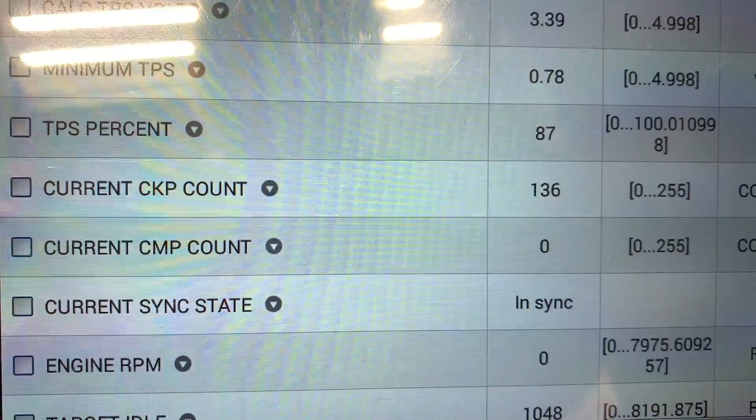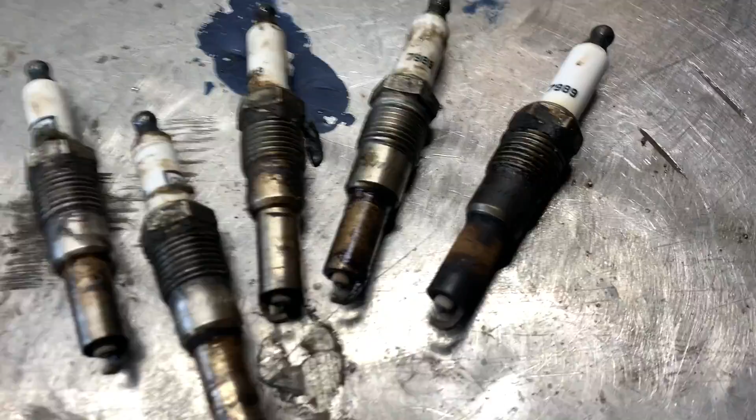Not getting a camshaft signal by the looks of it. These ones were definitely the hardest ones to get out for sure. Probably would have had a couple broken ones.

You know, Mr. Toms, it is not very nice out today, and I totally understand why you just want to sit on the chair and sleep. It's okay, you can do whatever you want, Mr. Toms. Mr. Toms.

Yeah, it's definitely not very nice out today at all. We got lots of videos to edit today, but need to run down to KMS Tools. They got sawhorses on sale, 2 fold-up ones, $54. He's gonna be starting on the 8.8 axle pretty soon, get that out of the way.

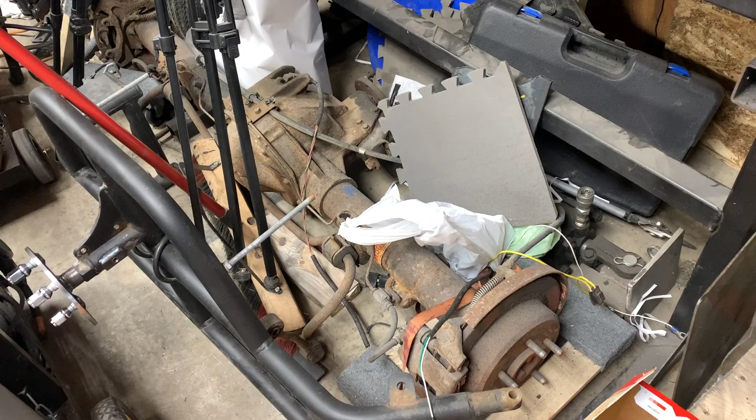They say they're good for 1,000 pounds, plastic though, so when I start working on the axle I'll have to put a fire blanket on it to help protect it. But probably in a couple of weeks, start tearing that old turd down, getting it ready. Lineups to get into Princess Auto, just like Russia waiting for the bread.

What do you got on your nose? Here, what do you got on your nose? You got some sand from sniffing the ground after you took a big dump. It's raining out and you have to come outside just to take a dump. Sometimes I just don't get you, and I don't. You're gonna sniff my hand before you bite it? Is that what you're gonna do?

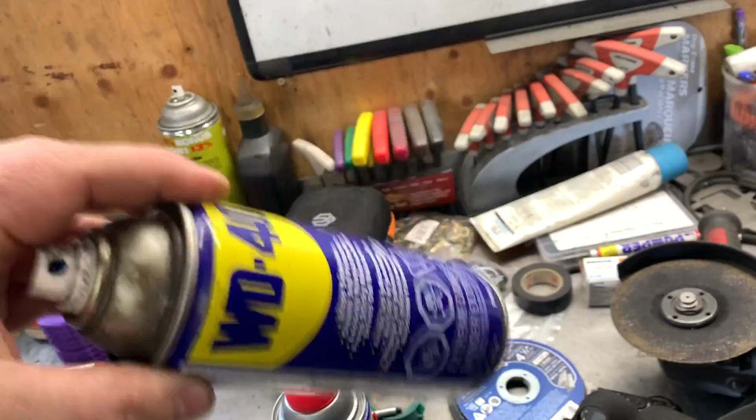And this can of chain lube is fucking done with. Fresh new can of WD-40, but what I really needed to go to Princess Auto for was cutoff wheels. I got 1 in the grinder and 5 right there. Hopefully it'll be enough to get me going.

Princess Auto wanted way too much money. And I don't know about you guys, but unless a cutoff wheel is about a 16th of an inch, I just don't understand how people could use the thicker cutoff wheels that are like an 8th of an inch or whatever. Those are way too big. Way too big. Let's get this Jeep outside and start building the metal tube bender stand.

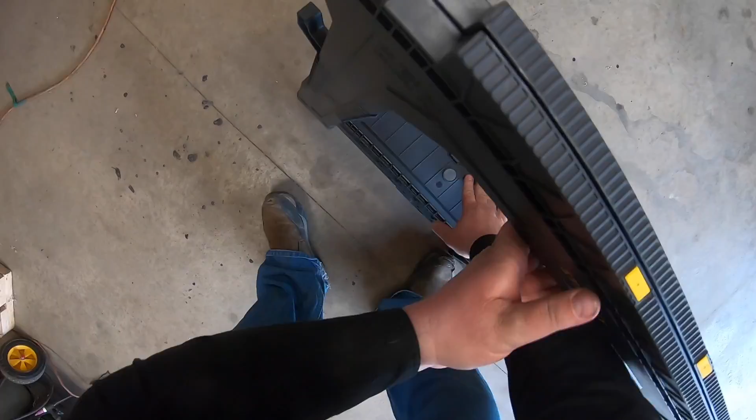Well, let's see how complicated these sawhorses are. That's it. All right, let's grab this metal. This one I'm gonna use to help build it, except for the 1 inch.

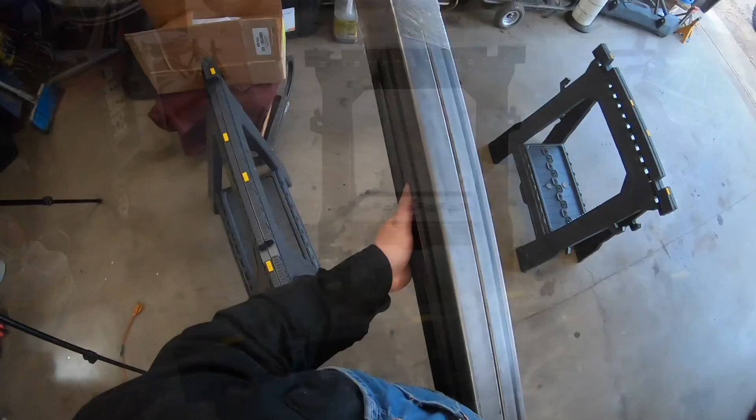6 feet. Now comes the time to figure out - I got 6 feet of tube, so I want to utilize it as efficiently as possible. So if I make the base like an H in 2-foot sections, I'm hoping that won't have it fall over when I'm bending tube.

Now ultimately that's going to come down to some common sense, which a lot of people don't have. If you have 10 feet of tube at the back, it's probably gonna topple over, so you're gonna have to use a stand. Probably build it the same height as the sawhorses, or pretty close to that, because then if I'm bending tube I could have the overhang on there.

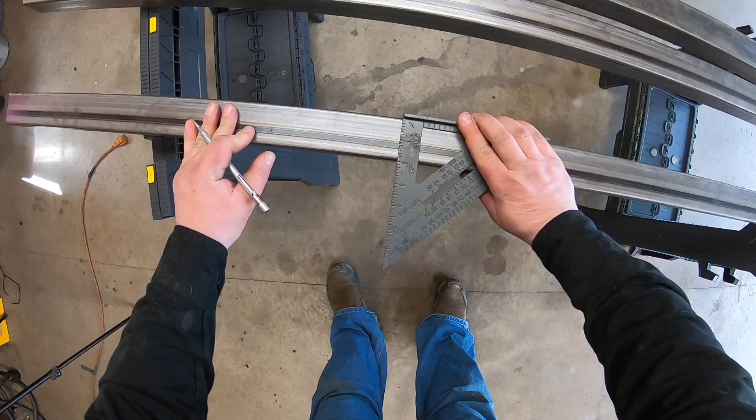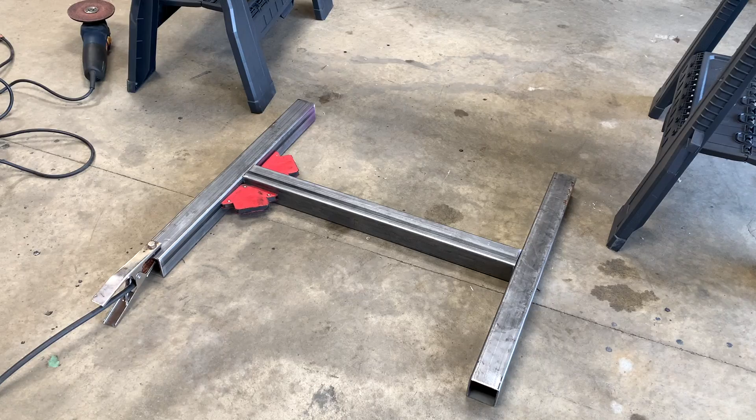Use my old Speed Square here to scribe my mark. Got my base laid out. Just gonna tack everything together first, just in case you gotta make some changes, you can bust it apart easy.

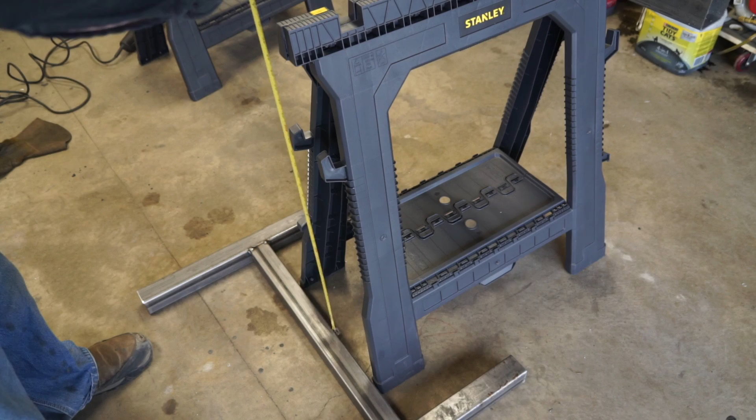So measure now, 29.5 inches.

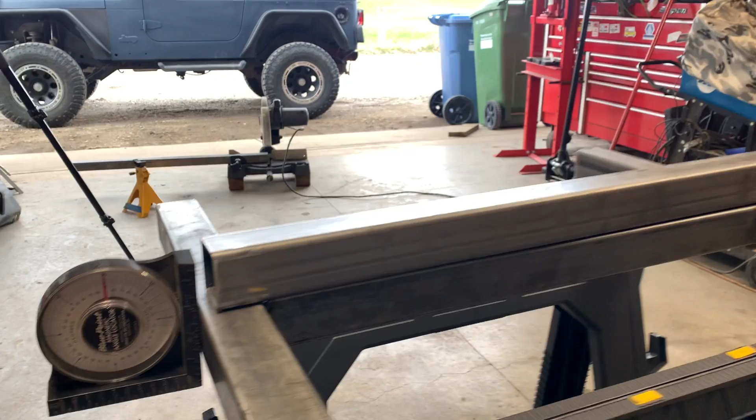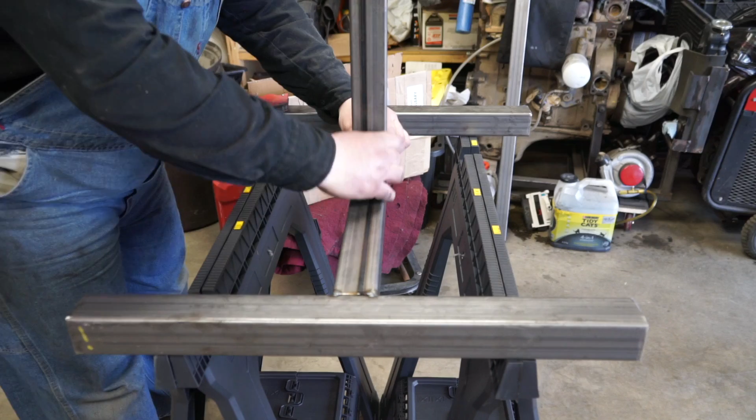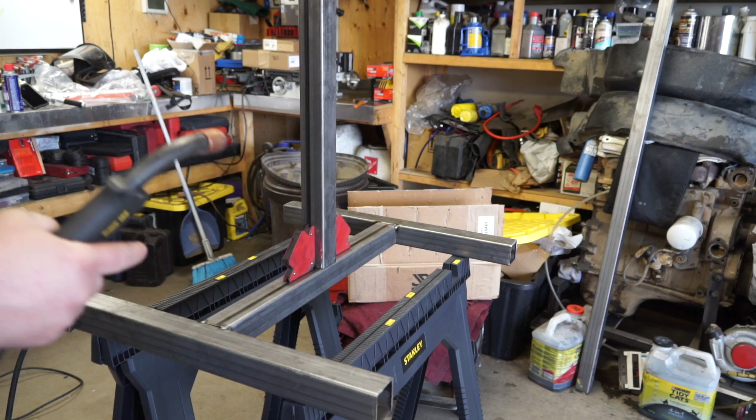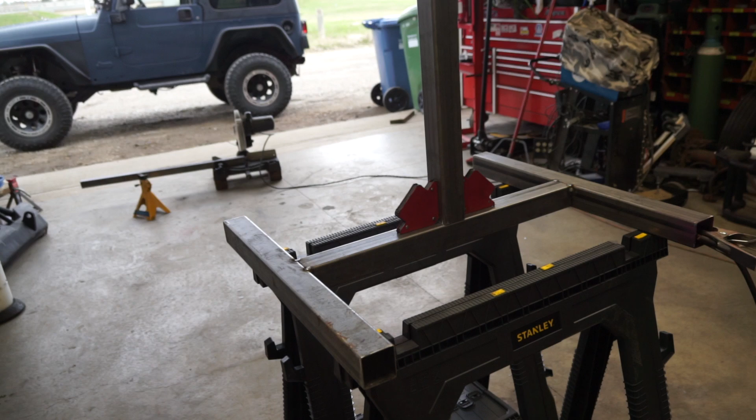This is where one wrong move can make everything not level. I need to make sure I'm going to be level both ways, on this axis and this axis. I'm at 90 here, so I'm just going to throw a tack in the corner, a small little tack, and then I can manipulate it afterwards. Now going to this side, still at 90. Gotta throw another tack in. Double check, and then I'm just gonna tack all 4 corners. All right, so that's all tacked together.

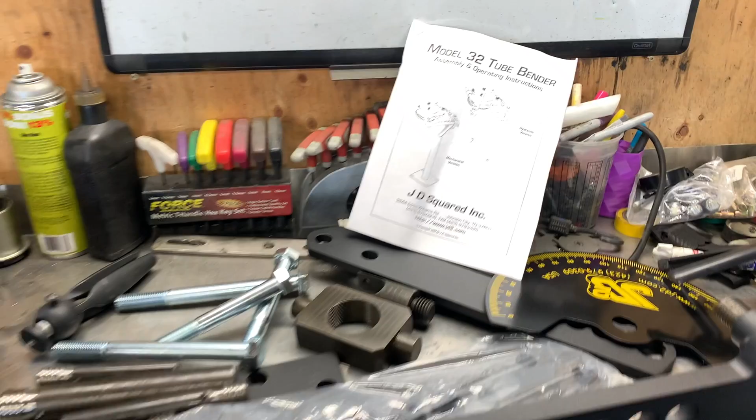Before I can put the platform up top, I need to assemble the bender and see what kind of platform it needs to bolt onto. Model 32 tube bender, JD Squared.

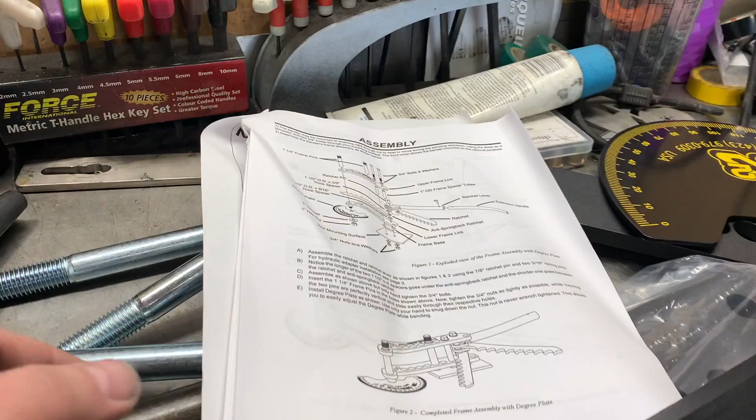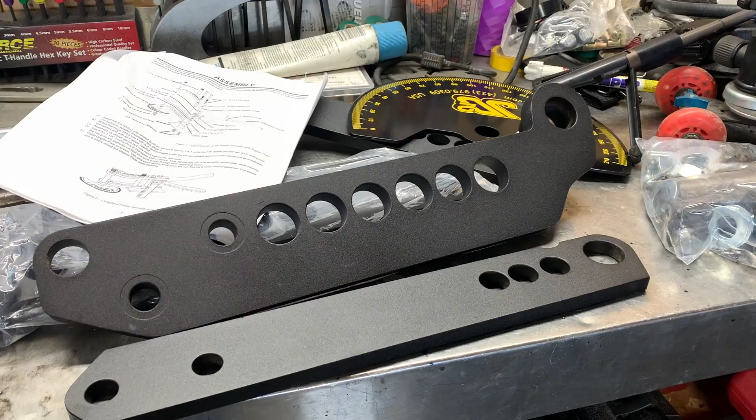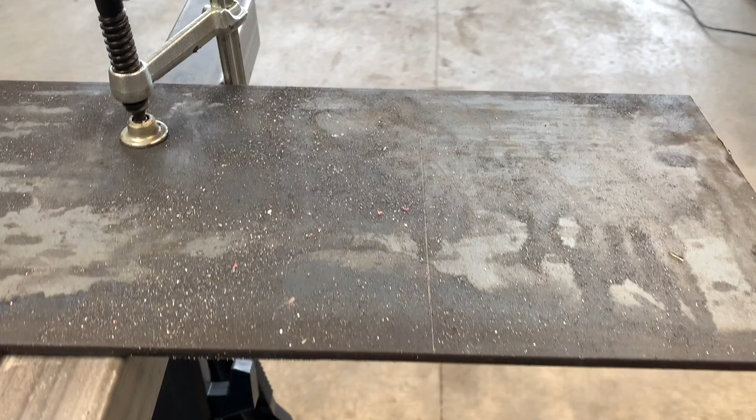Well, let's see what we can accomplish. Looking over the instructions, no need to overthink it because it says it bolts through anything you can put 2 3/4 inch holes in. So I don't have to assemble this to figure out how it's gonna mount, I can already see. Looking at this plate right there, that's what I have to deal with. Not a big deal, remember this plate when I built that for the fab?

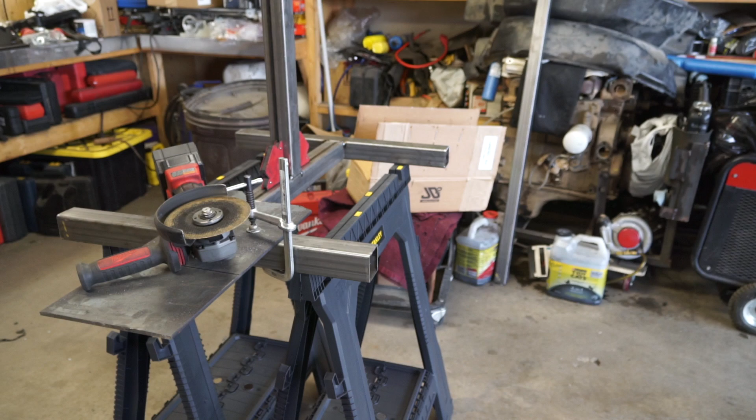I wonder if this is gonna burn up all my cutting discs. Gonna find out. I'm actually quite surprised, I'm 3/4 of the way through the first disc and it just cut like butter.

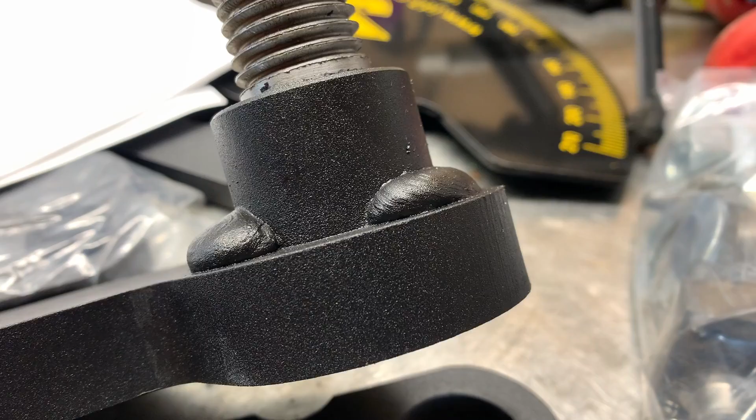Is it me, or does that weld look like it's cold with no penetration?

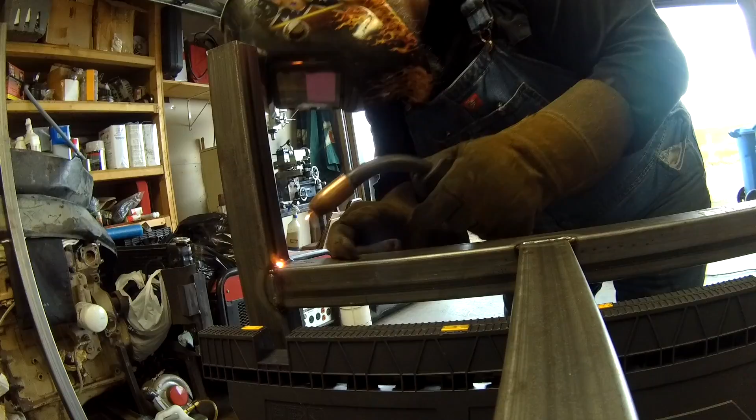So there you go, the stand is made, welded in, put a couple gussets on her because the tube bender is gonna be pretty heavy. The gussets will take the stress off of the welds at the bottom.

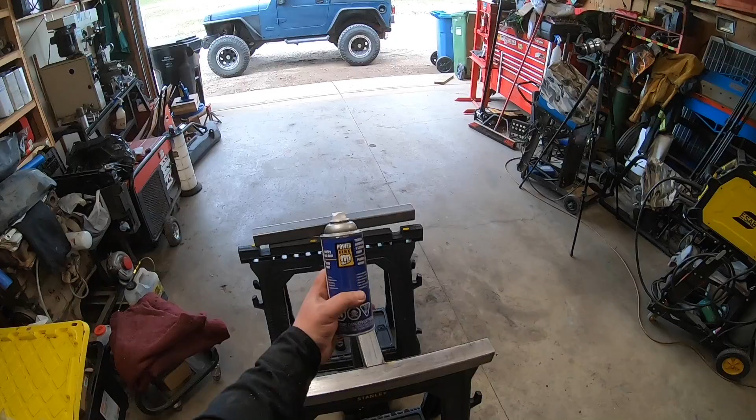We got the Power Fist, fast dry anti-rust Power Fist. Gonna get spray paint all on my brand new sawhorses.

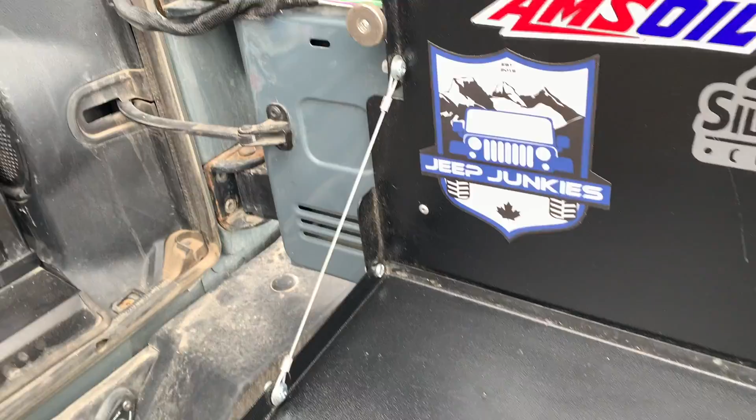I was working away, Steve, home guy 4x4, known on YouTube and Instagram, came by with his JK. It's actually a really nice build. But what I wanted to see off his Jeep was the tailgate table at the back, so I want to fabricate my own. I wanted a close look at how it was all built and assembled so I could try to make something similar. I think it'll be pretty easy enough to do.

Alright, threw some paint on her.

Mr. Toms, are you comfortable there? Is it bedtime for us? Is it? Are you comfortable, just gonna sleep on the couch tonight? Is that what you're gonna do, Mr. Toms?

You love the cuddle. Well, it's the next day, sun's starting to come out. There was a couple little flurries first thing in the morning, but I think it's going to be an alright day. Let's finish this project.

Hello, Mr. Tom Gatz, what are you doing? You want to go inside? Yeah, too cold for you? Well, outside's warmer than what the garage is.

Got the stand on the ground, and then there's my foot pedal right there. They give you such a short hydraulic line. I'm hoping that I could point the hydraulic cylinder down, and then maybe I still won't need to put it on a block or something. We're gonna find out.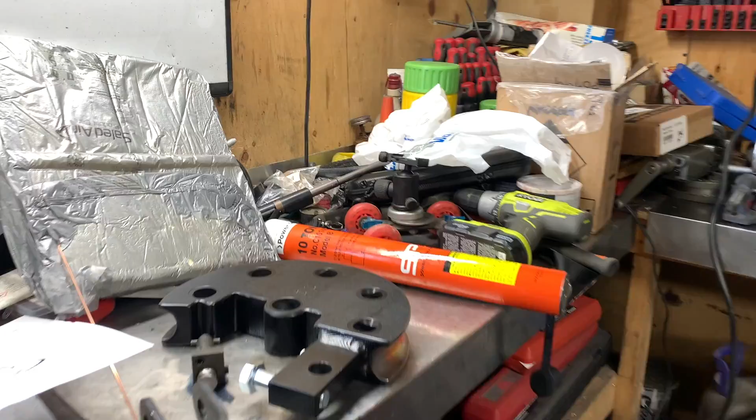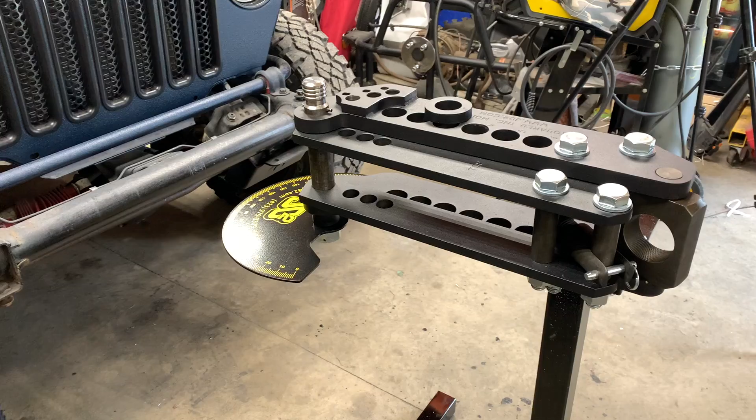Okay, so jumping forward a little bit, let's go to the bench here where I got my 1.5 inch die and some other pieces. On the stand, I got it assembled besides for putting the hydraulic cylinder in and everything else. But the problem is, this is what the problem is, I got this, this is a leftover piece. Now coming over here to the instructions.

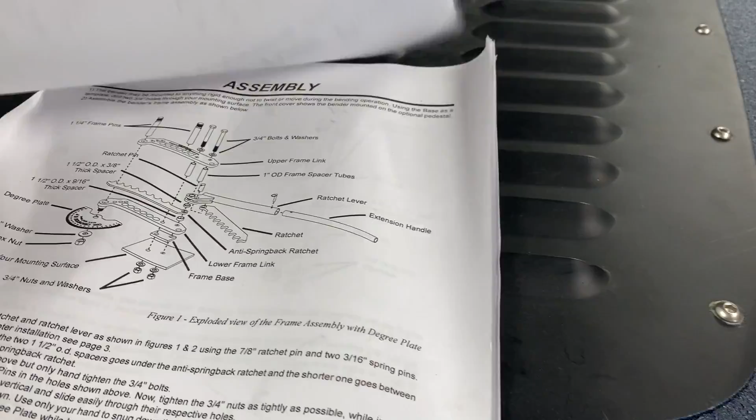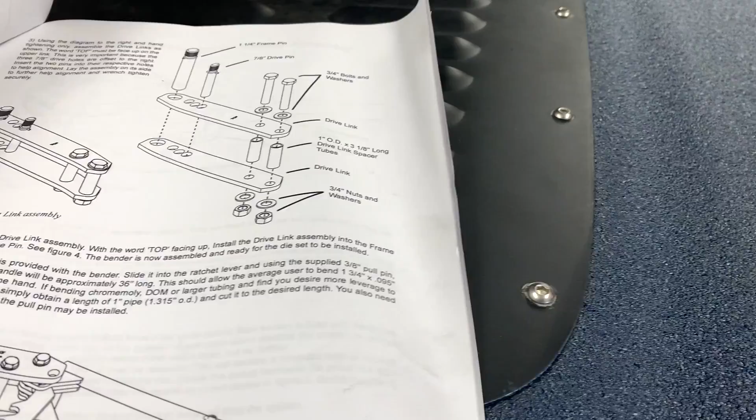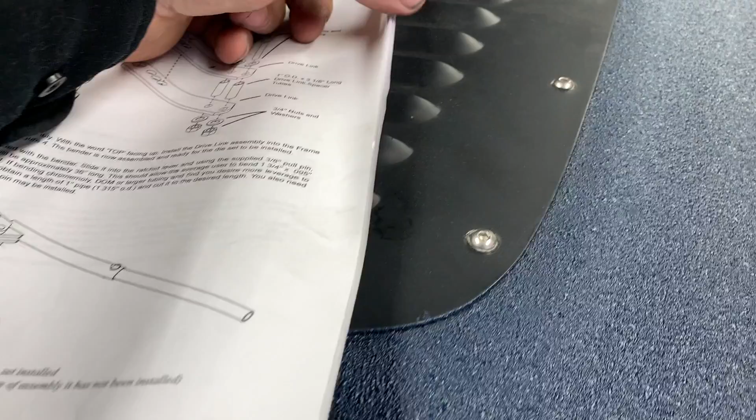So it shows the assembly of the manual bender, and I don't see any big die used there. Then go to the hydraulic ones right there, I don't see any big spacer or washer, whatever it is. Let me try to turn this page again, and it shows the hydraulic bender assembled there, and I still don't see where it would go.

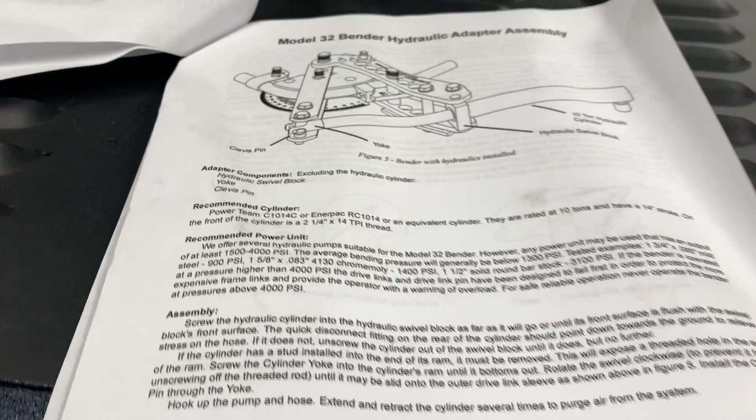Google JD Squared model 32 bender. Did some Googling online the last half hour, and I honestly can't figure out what this piece is, or where it could go, or what it's for.

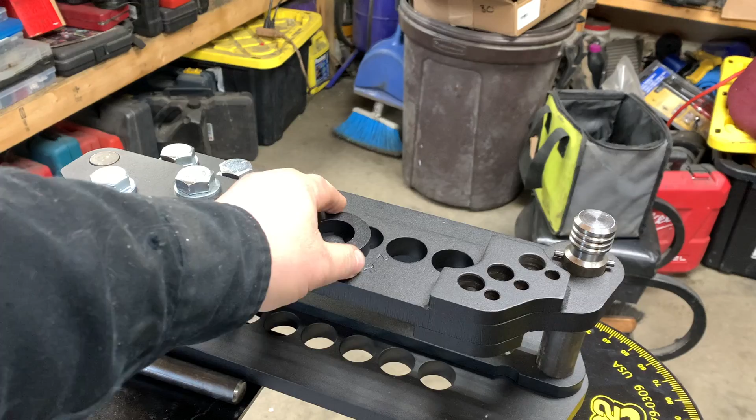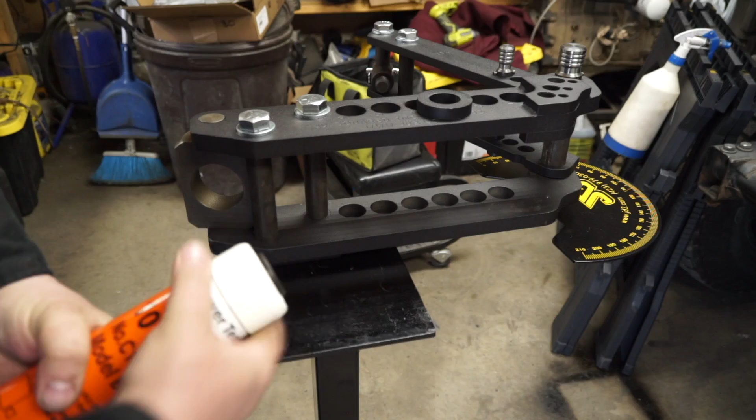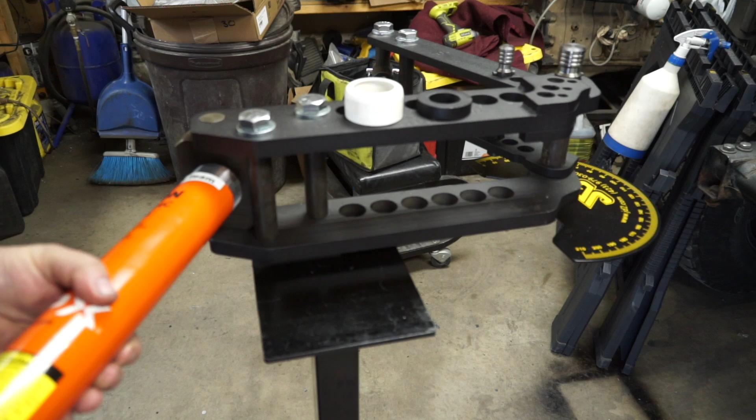I don't know, but let's, we got the cylinder on the table there, let's thread it in. This is the hydraulic cylinder, and then we start, hopefully get it threaded through somewhere.

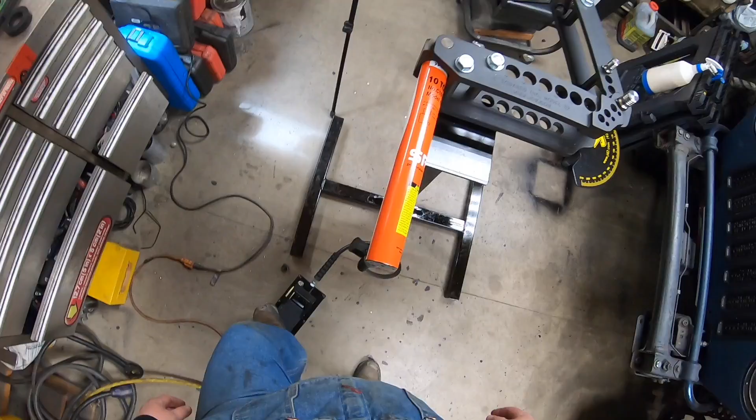Okay, we're going. We're gonna find out if this thing works or not. It says pump foot down. Oh shit. I turned the air off. I was getting scared there for a second. Oh, there we go.

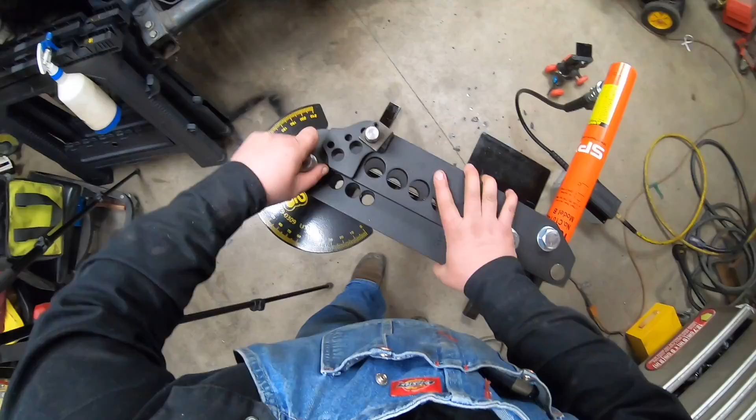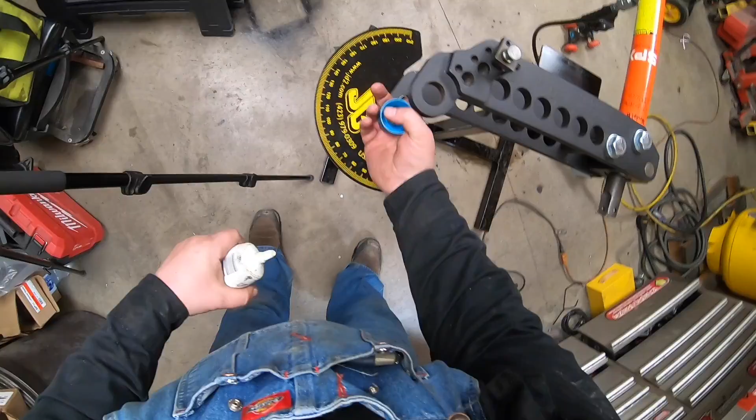All right, well, let's put the die in. Except this piece is stuck. Why won't you come out? I'm gonna throw some assembly grease in these holes.

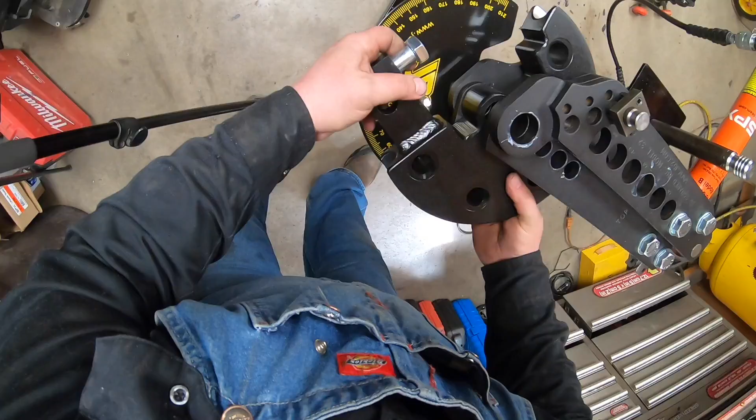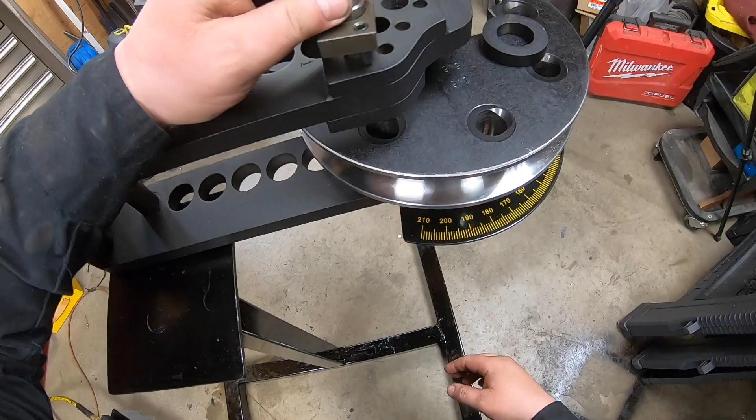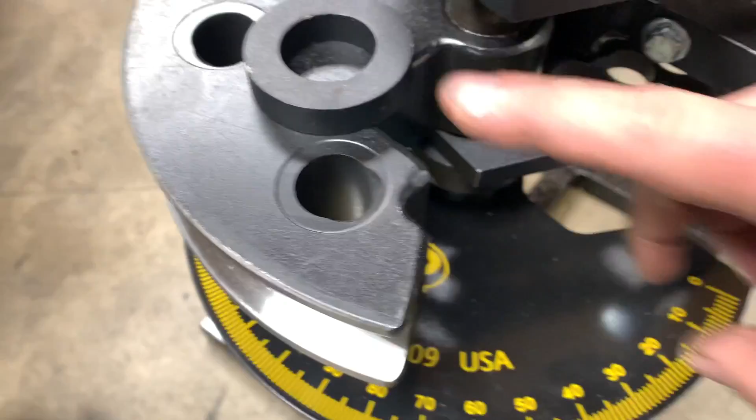So now this is my pin. Try to get over here so you guys can see, it's set all the way to the bottom. I wonder if the spacer actually goes in between here. I'm gonna put it in there, then double check.

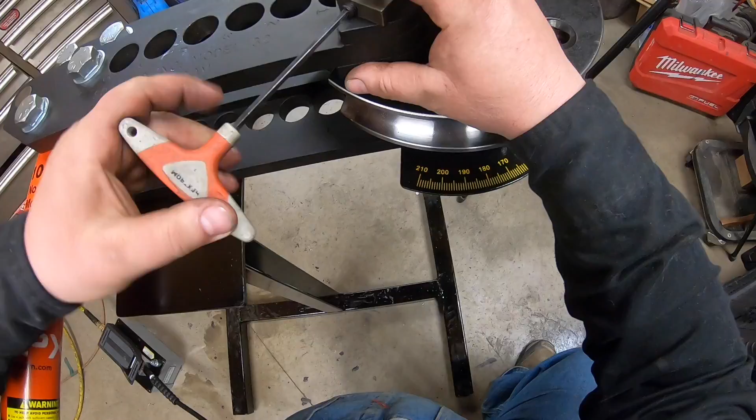Bear with me here, this is my first time trying to figure this all out. Of course it's not as smooth as you see on YouTube videos. You tighten that up, and this thing's marked, says top hole number 4.

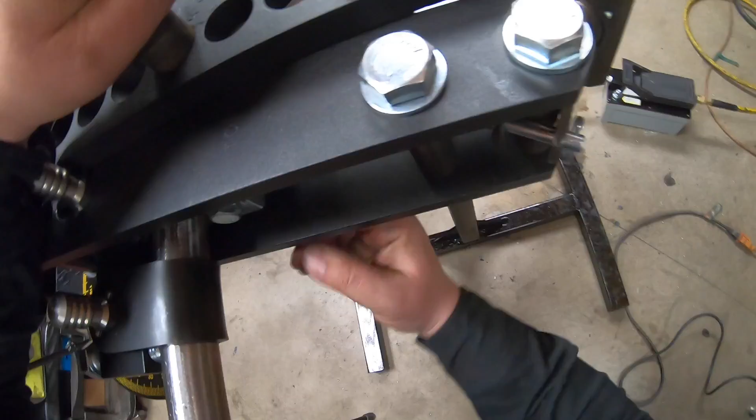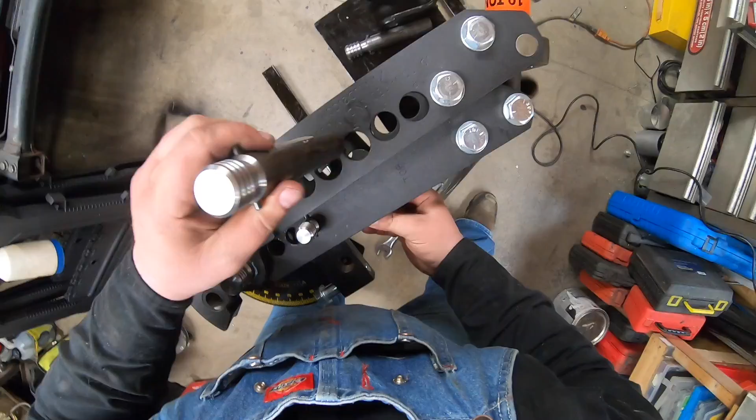But why don't you want to line up with the bottom? Why are you playing this game? Spray the pin with some WD-40. Why don't you want to go in? There we go, finally. All right, we'll try this again.

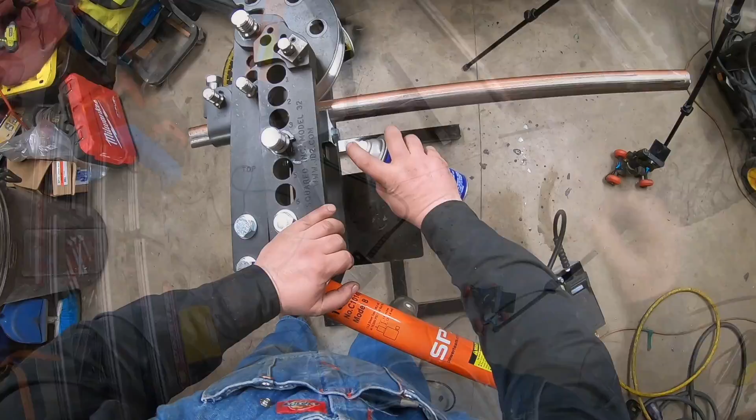So it says I need to take out the slack. There we go, slack is taken out. Just gonna WD-40 the pipe there. All right, everything is set up for the first practice bend. Wish me luck, hope we don't break something.

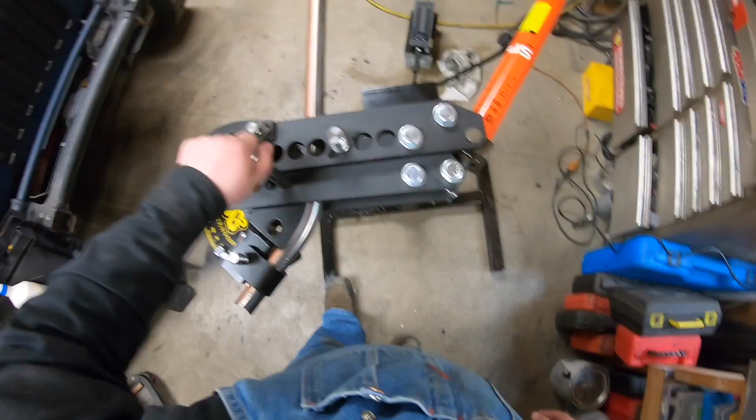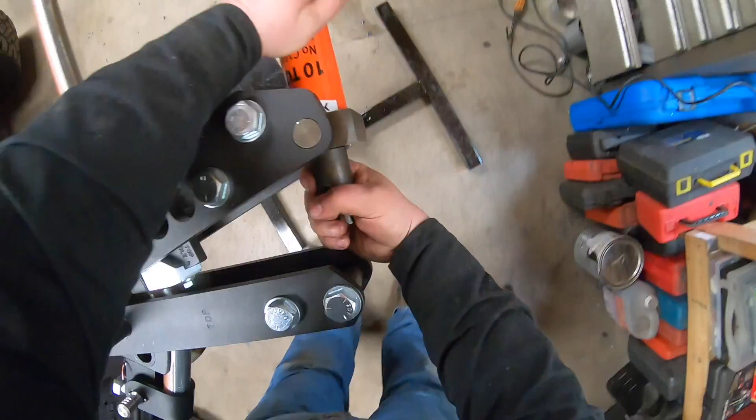So I gotta try to make an adjustment somehow, because I can't seem to go back far enough to get that into the hole for whatever reason.

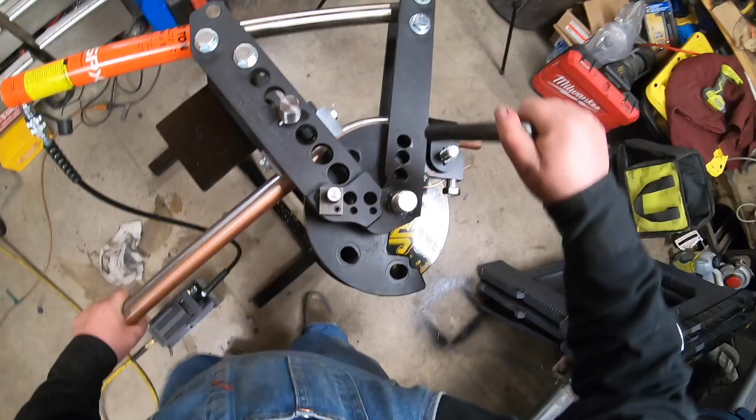All right, got the pin to drop. Had a hydraulic leak from the hose fitting or something. Redid those, we're gonna see if we still have an issue. All right, try this again, see what happens.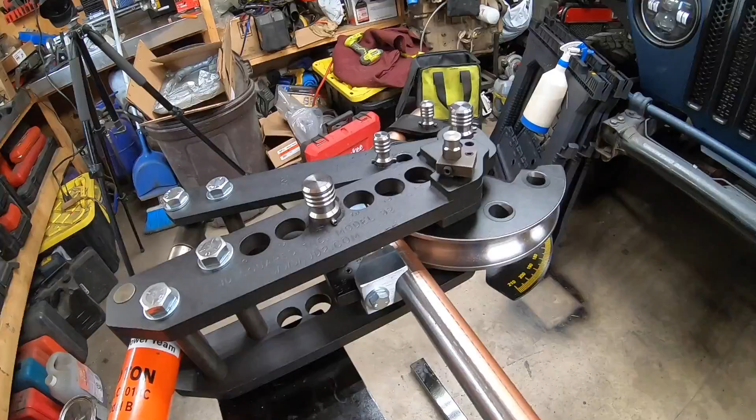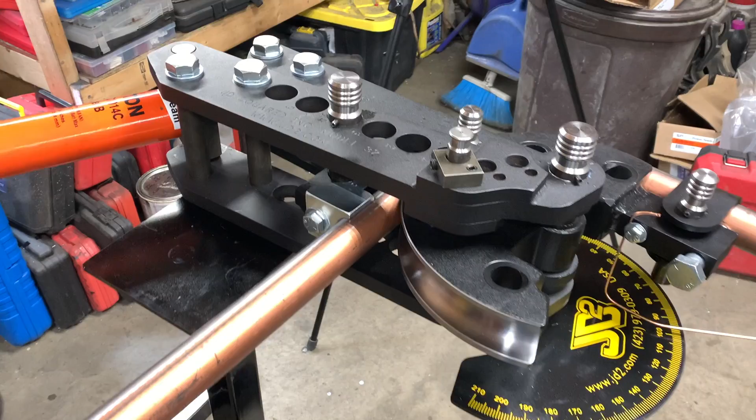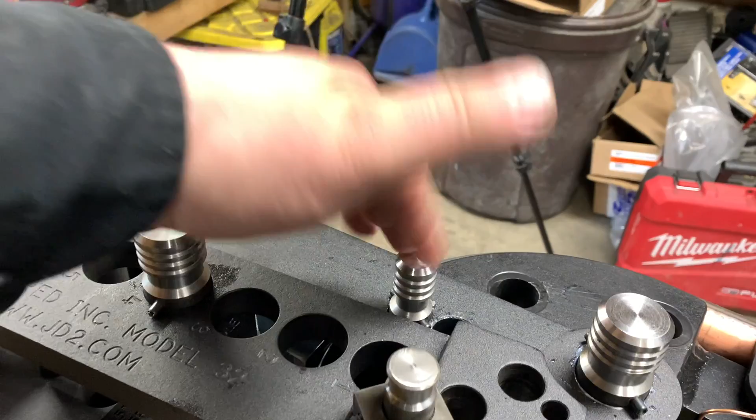All right, this is what I figured out in the first bends. The key is, because of spring back, to bend it until this lock starts lifting on the next piece. When it does that, release the pressure and the arm will come back and you can drop the pin inside. That's what I found. You can't say for sure it's gonna work.

But I'm about to find out. There we go.

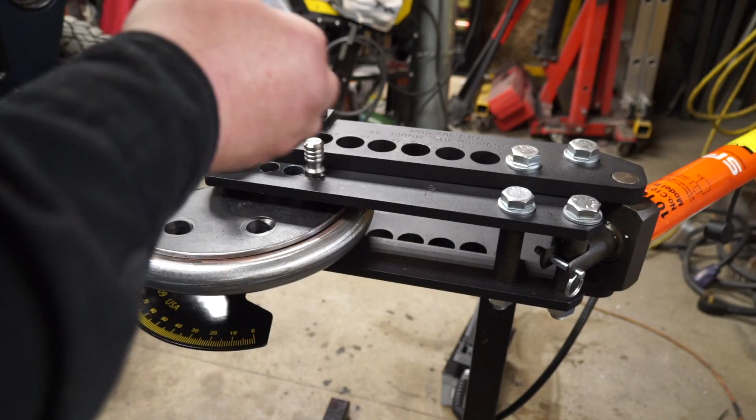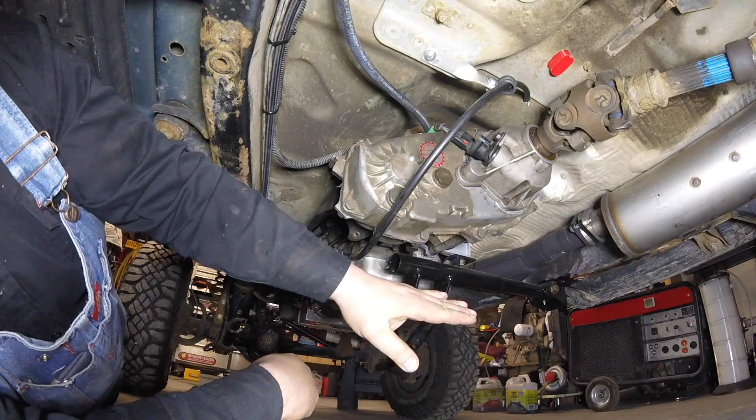What I want to do is, I'm not happy with this. It worked, but the problem is this shifter cable will have to come back because the drive shaft bolt comes up through here, so that's gonna be a problem. So with this 180, it's gonna be put in right like that, and that will solve all my issues and get rid of that.

All right, the other day got a letter come in. Says, motherfucking beer time, white trash TJ. That's his handle on Instagram, you can check him out there. It's kind of hard to see, but it's there. Tomcats, it's motherfucking beer time.

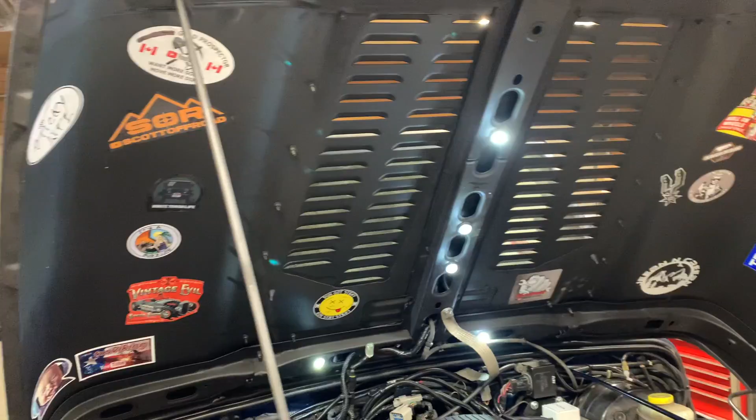Do you want to go outside? Tomcats, do you want to go outside? Do you? You gonna play with your box? Are you gonna knock it over? Tomcats. What are you doing? Come on. Come on. I know you want to go outside. Come on.

Let's grab an old brewski from the fridge. Gonna bust out the Yukon Red. Fuck yeah, shut her down, motherfucking beer time, Yukon Red. It's been sitting in my beer fridge for a while, so I wonder if it's stale. It's flat. Tastes good, amber ale, motherfucking beer time everybody.

So, tube bender's assembled, works. Had some little quirks at first with hydraulic fittings leaking. Took them apart, put some dope on them, retightened them up, working good. Figured out how to operate that with the pin and when it retracts, how to get it back in. Have to get it to where it starts pulling out of the hole, then back it off a little bit to pull the pin off, let it come back, it'll jump in. So I'm pretty impressed, I'm looking forward to fabricating some stuff now.